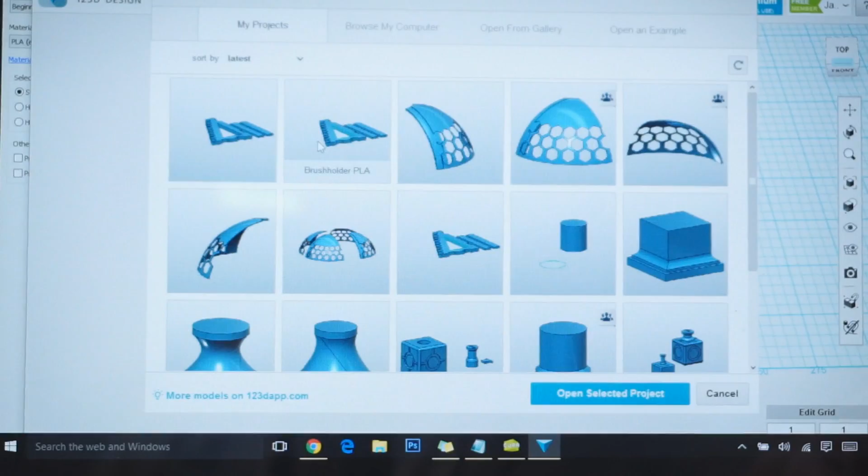What I wanted to share with you this time was a start to finish look at printing an object. In this case, I'm going to be printing my new brush holder, which is something I created myself.

It might not look like it here, but this is actually a brush holder, or I should say half a brush holder. Half of the brush holder kit.

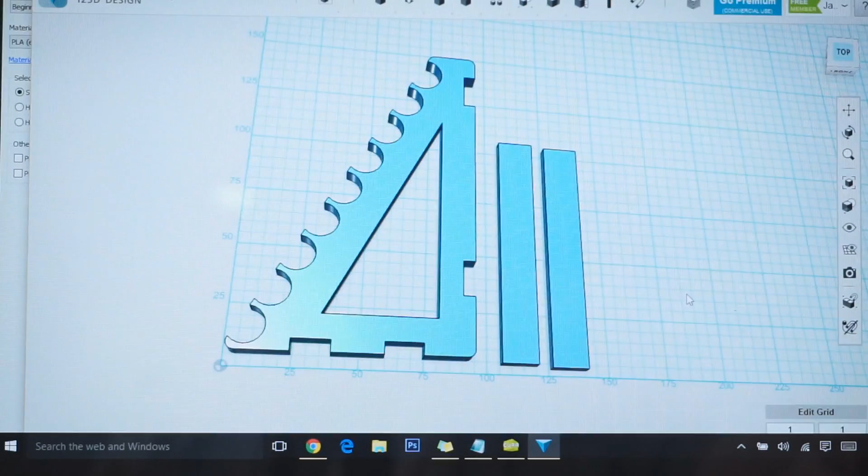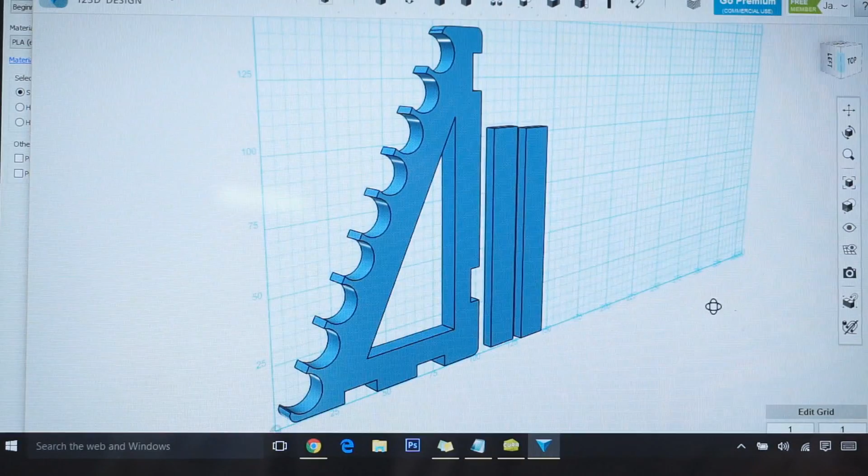I created this because I'm in the process of organizing my shop and trying to become generally more organized, and I can't do that if I don't have places to put everything, especially those things I keep at hand. I had a brush holder that I got from one of the Games and Gears brush Kickstarters.

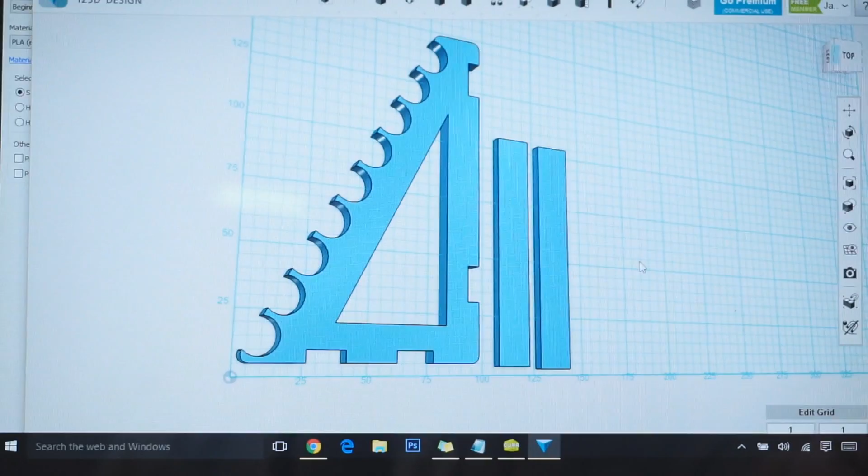I liked the idea of it, but I didn't like the design, I didn't like the construction, and I didn't like the materials it was made of. All I really liked about it was the idea of having a brush holder, so I decided to go ahead and design one myself.

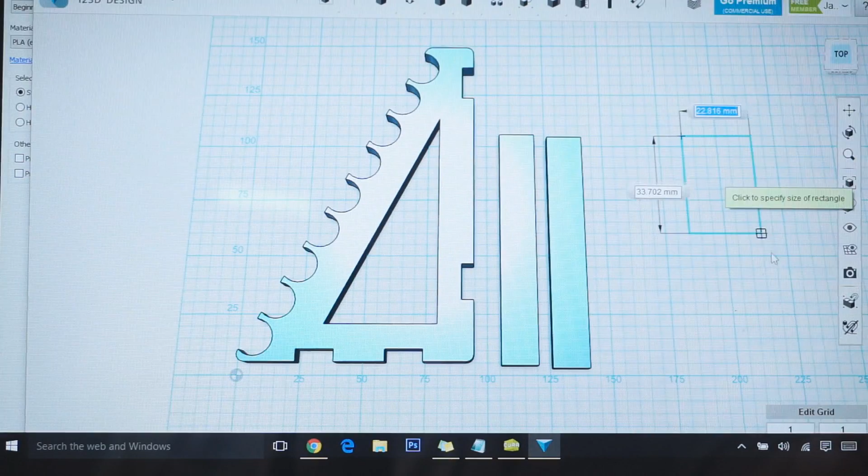So this is essentially a real straightforward project that initially I created using the sketch tools, and with the sketch tools you can just draw something out in 2D.

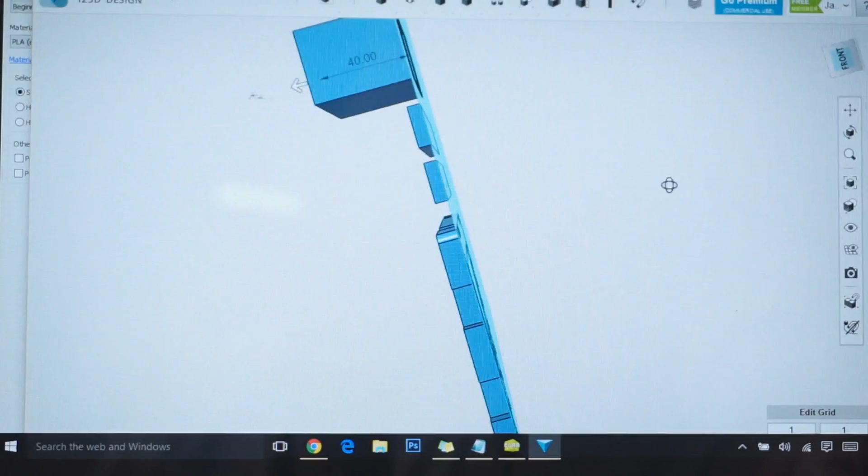And then when you're ready to go, see how that's just a single plane. But when you're ready to make it 3D, you can just extrude it and make it as thick as you need.

So that's essentially what I did here, and at some point I might go through the whole process of designing something. This took a couple of tries to get it to where I liked it. The first time I did it, I just eyeballed the whole thing.

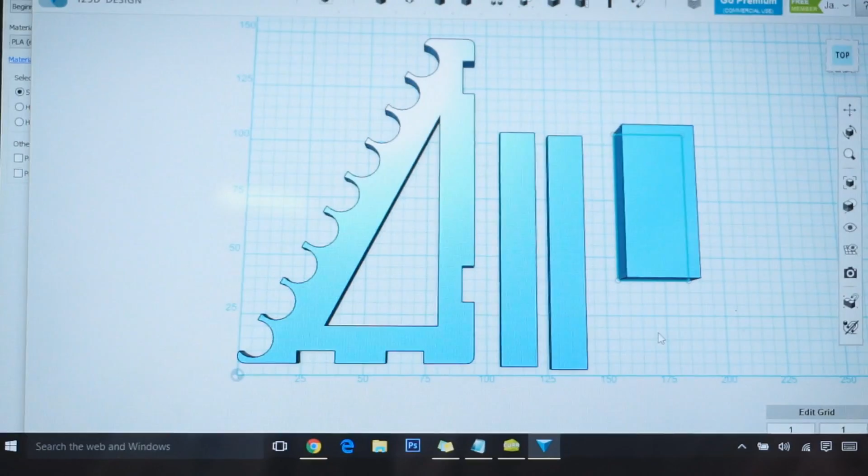I sat down at my desktop and thought, you know what, I really want to do the brush holder. So I just started designing it without having measured anything. It was all just guesswork on my part, and I gotta say, I got closer to right than I thought I would.

The thing I screwed up was the size of the brush holder areas. They were super tiny, they weren't going to work at all. These are actually much bigger than a standard brush, but what's nice about that is it means you can also use it to hold small brushes as well as large brushes, as well as X-Acto knives or sculpting tools.

Or whatever else. These two pieces here are essentially the pieces that hold everything together, and of course there needs to be 4 of them, 2 for the back, 2 for the bottom. That makes the thing really bulletproof.

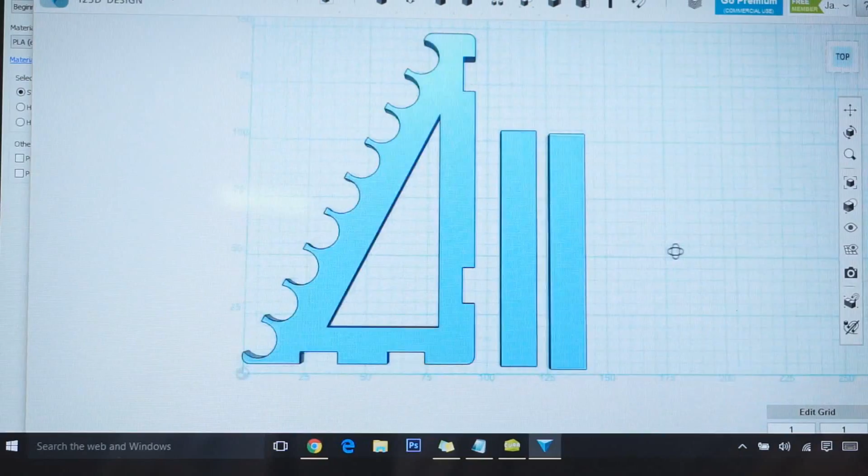It probably doesn't need that much support, but since one of the things I didn't like about the brush holder I had before was that it was so flimsy, I figured I might as well make one that was bulletproof. Then once I had this done, I just saved it as an STL file, you just do export as 3D.

By the way, this is Autodesk's 123D Design, which at the moment is my go-to 3D designing tool. Certainly not the only one out there, but it seems to do what I need it to do right now, and I'm enjoying using it.

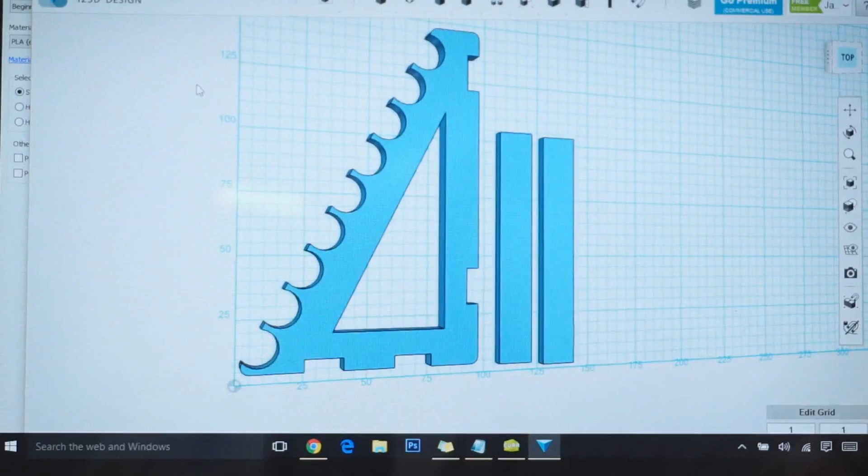But anyway, you export that as an STL and just save it to my desktop, at which point we go to Cura. Cura, as I mentioned in my last video, is a slicer. This is the program that tells the printer what to do. So then I would just load my model file, which I had just saved.

And there it is. This checkerboard pattern here represents the size of my print bed. So as you can see, I made it as big as I could possibly print it, which was kind of the idea.

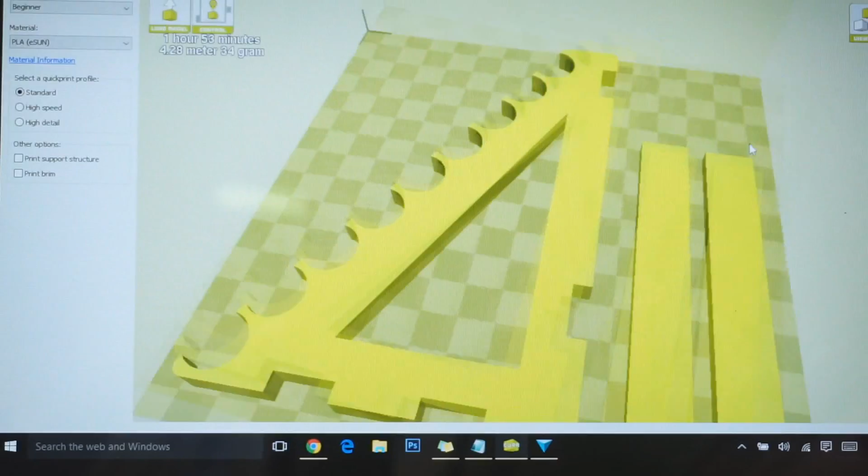I knew the size of my print bed when I designed it initially, and so I knew that I wanted to be able to make it as large as possible to fit on that bed.

And so from here, you're able to choose the material that you want to use. The way this is broken up is to make it as simple as possible for new users, so material ease of use is your first drop down.

I'm on the beginner setting, and the only reason I'm on the beginner setting is because that's where PLA, the material I'm going to be printing with, is located. And then you could also select...

How fast or how high of detail you want to print. I've been printing these at standard, which is about 100 microns of vertical layer height. I could do it at high speed, which does 200 microns, or high detail, which does 50 microns.

But on high speed, I don't like how it looks, and at high detail it seems unnecessary and slower than it needs to be. So the standard works just fine.

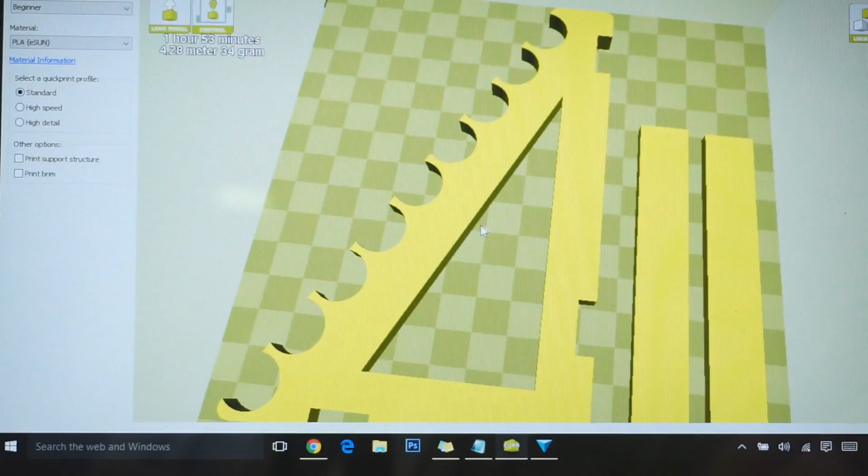And then there's a couple of other options down on the lower left here, and that is the print support structure or print brim. These are both options that, if you have a model file with overhangs that need support, you would add a support structure.

And a brim is essentially, I think, and I haven't done it, but I'm pretty sure, a piece that you lay down on the bottom below your finished piece that kind of helps it stick to the build plate. That's a guess.

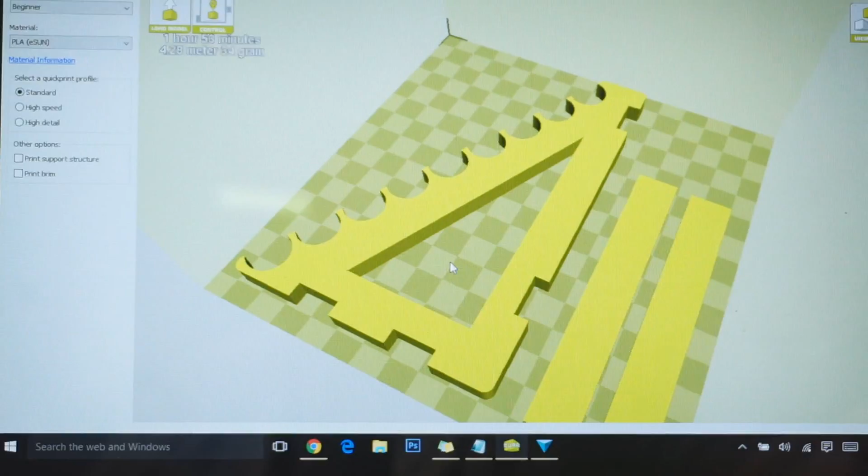And again, I'm kind of a beginner here, and I think that's usually called something else, which means I might be wrong about what that is. Anyway...

I could also take this over to expert mode and switch to full settings. Sure, let's do that. And then that gives me a whole bunch more control over what I'm going to be doing. I can control the print speed, the printing temperature, the bed temperature.

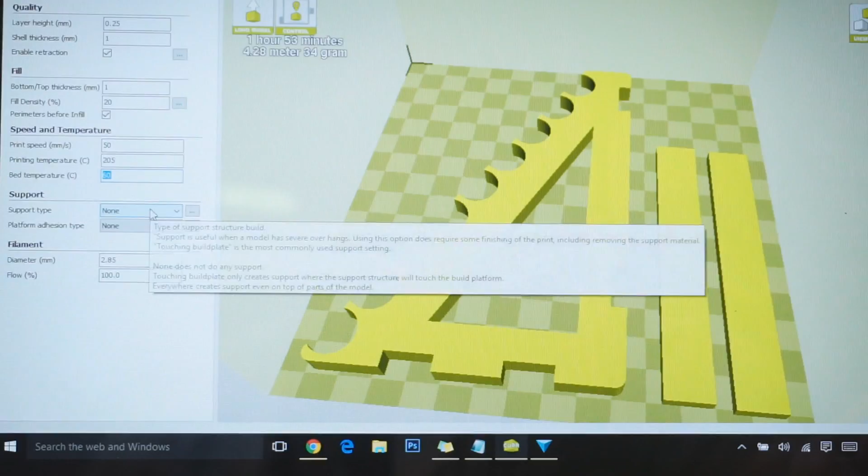Oh, that's interesting. The types of support—oh, I never even... oh, you know what, there you go, brim and raft. Raft is the other term I was thinking of for the piece that goes underneath.

The diameter of filament and the percentage of flow, all kinds of things. All kinds of things. Plugins, and what your G-code looks like.

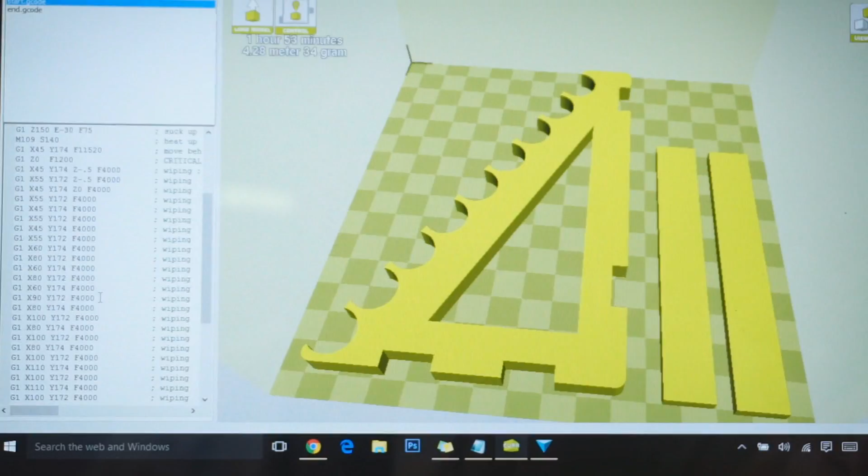This is essentially the code that's going to run as you print. Most of this stuff I've never looked at because it hasn't been necessary.

Over here, if you look, right up there, it tells me in advance that this is going to take about an hour and 53 minutes, really about 2 hours to print. And it's going to take up 4.28 meters or 34 grams of material.

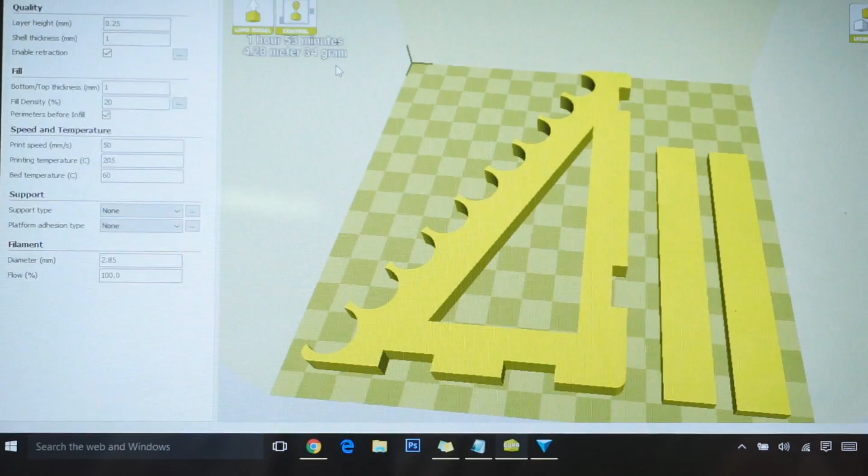And I've found these numbers to be pretty accurate overall. I've been able to predict when prints are going to be done. I think it tends to be a little bit on the low side in terms of predicting the time, but in terms of the amount of material, it seems to be right on. So that's pretty cool.

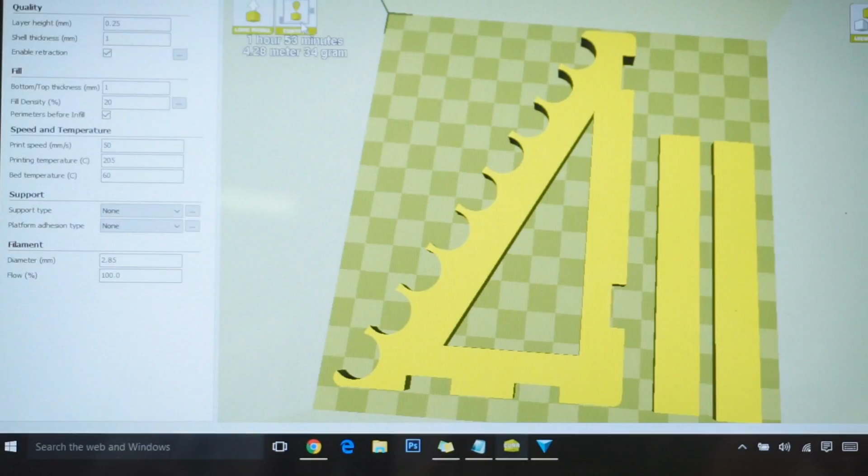But then I'm going to hit Control, that button right there, and this lets me set the bed temperature and the melt temperature for the material. Once that's all set, I just hit Print, and it's ready to go.

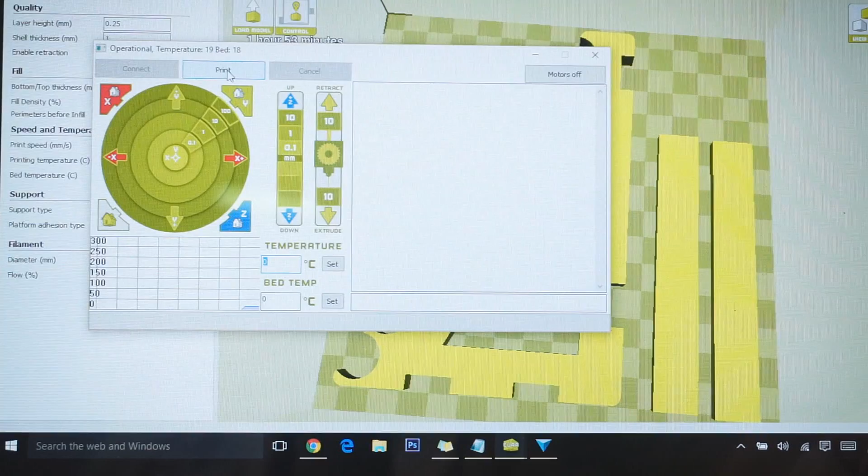So why don't we go ahead and do that, and I will show you a little bit of this printing at really high speed, because you really don't want to watch it do it in real time. Who has 2 hours to watch a thing print? Not I. None shall pass. All right, so here we go.

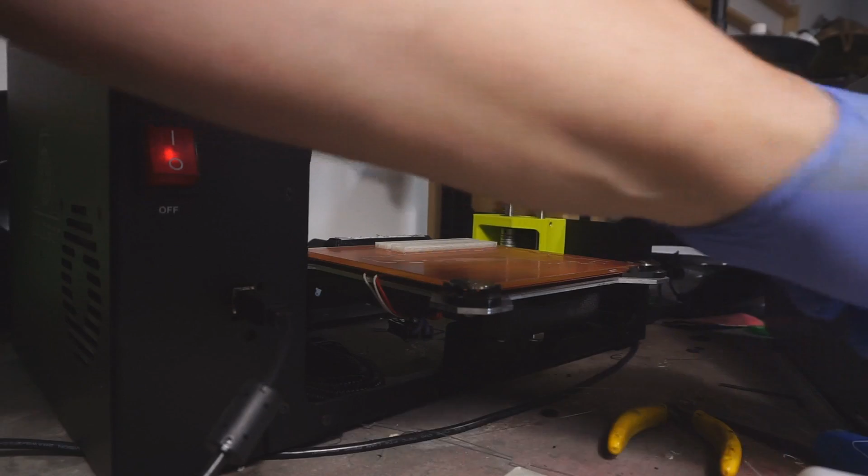So once I've printed out a second half, then all I need is a little bit of super glue, and I've got myself a brush rack.

You know, this is really the best part of having a 3D printer. It's not so much the cool fun things that you can make, although those are great too, but it's the idea that you can think of a thing that you need and then make it yourself. Which is not to say that there aren't other ways of approaching that. There's an endless number of craft skills that one could have that you could find useful in other ways. It's just that I find this approach a lot easier than many other approaches.

Could have made this out of wood, could have made it out of plastic without a 3D printer, could have made it out of cardboard. There's certainly a lot of ways that one can approach this.

I really like being able to do this. I like being able to have that certain amount of precision that you can get out of a 3D print that I would not otherwise be capable of, or at least not as easily as I can do it here.